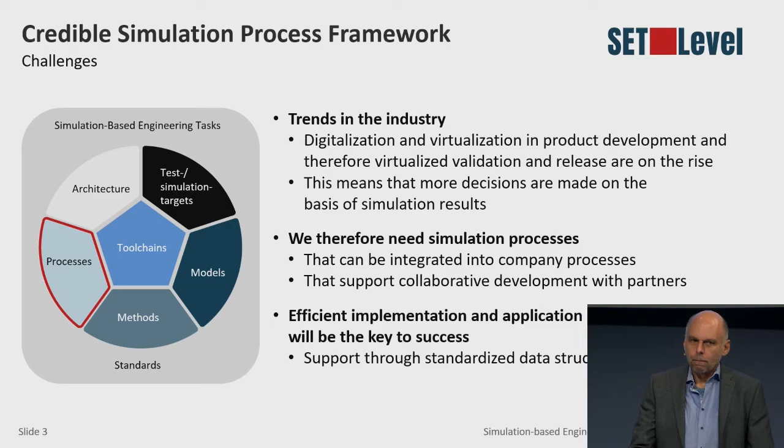So I want to start with the challenges, give a little overview, and the main part is how do we collaborate, especially with partners. So what are the challenges?

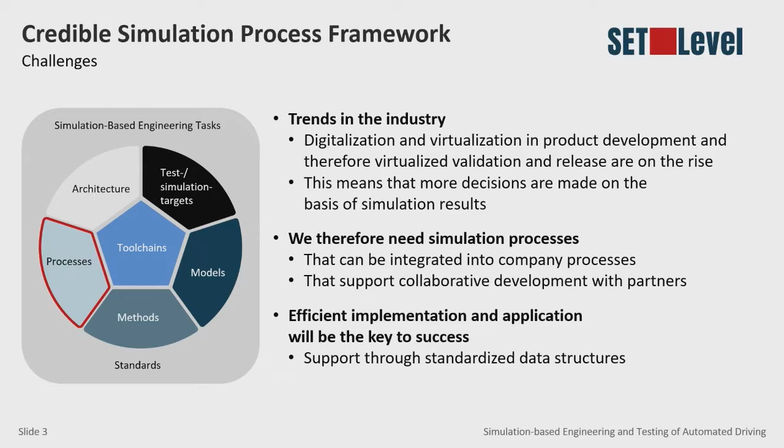In the moment, digitalization and virtualization is increasing. So therefore, we need virtualized validation and release of our products. That means the simulation process gets more important. And what's very important is that these simulation processes must be integrated into company processes, and that must also be supported so we can cooperate with partners. A key factor for success is that we efficiently implement these things so they can be easily used by our engineers. And for us, and that is also the reason for our project, we need standardized processes and standards.

So what you see here is our so-called simulation process framework. We had discussions with about 20 companies, and they all say, well, that fits. In our company it looks slightly different, but in the core, in every company, that fits. And I will explain now a little more in detail.

On the upper level, you see the product development process, and within a product development process you normally have thousands of decisions—design decisions and also release decisions. For every of these decisions, if we use more simulation, we have a so-called simulation-based decision process. That means for every of these tasks, we have to analyze the task, say what risk is inside this decision, and define our subtasks. The subtask can, for example, be simulation or also real testing.

And on that level, we have to collect the results of the subtask and make the final decision. What you see here on that level is mainly the focus of the public-funded project VV Methods. And what we were focusing on here are more the lower parts—the credible simulation process—where we need a clear input and where we can get back a clear output.

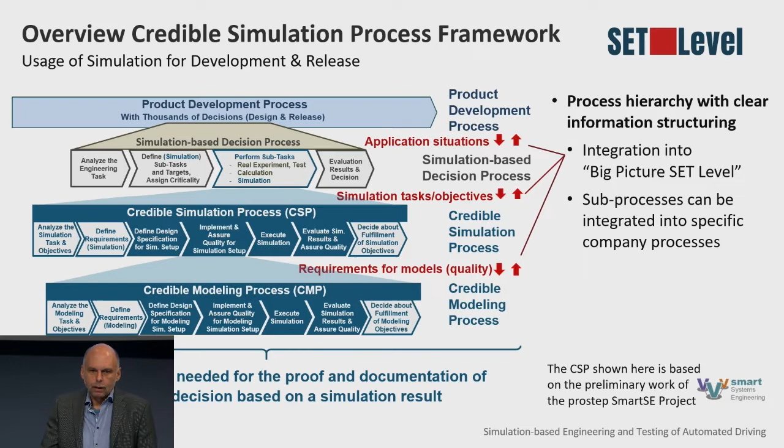What's really important, we need a clear structure, which we also used within our project here. And we also did it so this can easily integrate into company processes, because changing company processes is very complicated. So we have to somehow guarantee that our processes can easily adapt and integrate into specific company processes. And the other point, the really key point here, is we need all this information if we want to make a decision based on simulation.

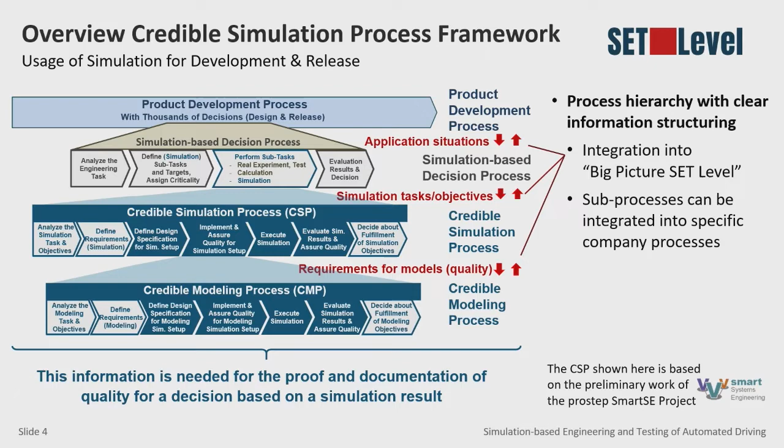Now we shrink that one because that framework is only paper, but what can we do with it? That is the next point. So that framework also gives you a frame for our methods, the methods we develop within the project. Because if we have, for example, a validation method, it must be clear where we use it in the process, what we need for input, and what is the output. And therefore, we use that simulation framework.

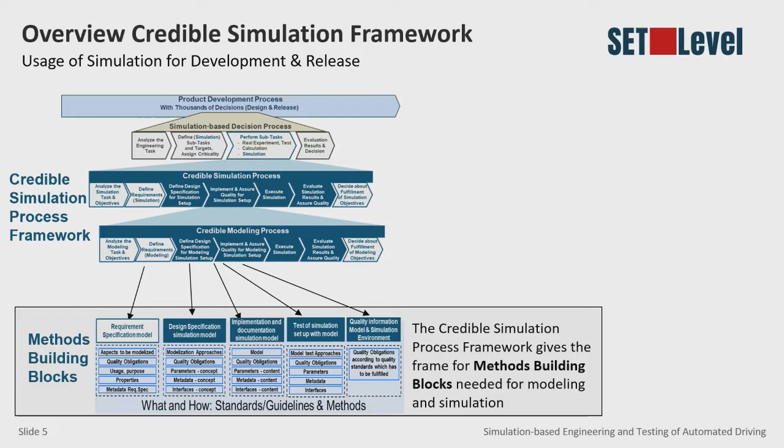And as I said, a process framework is normally only paper. For it to work efficiently, we also need data standards and somehow IT support. And what we already achieved is that we have data formats which are consistent, and we already have tools which support that process.

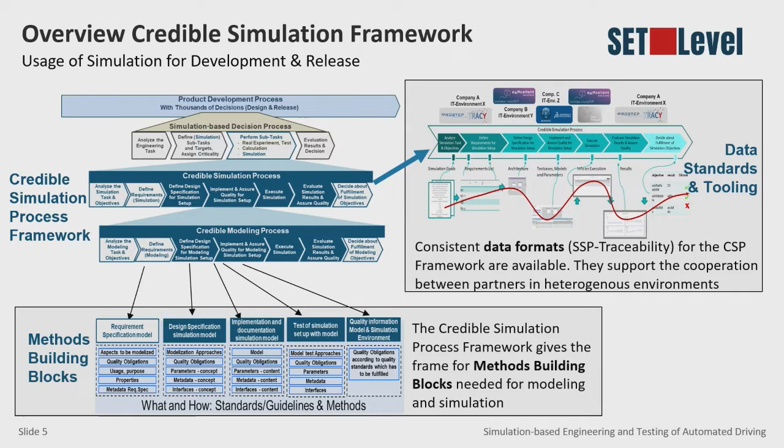Now to the very important point, because inside a company that often already works. But what's now very important, especially in the field of autonomous driving, is we have to work together with partners. So, for example, if an OEM, partner A, is developing an autonomous driving function based on a camera signal, for developing it he needs a camera model.

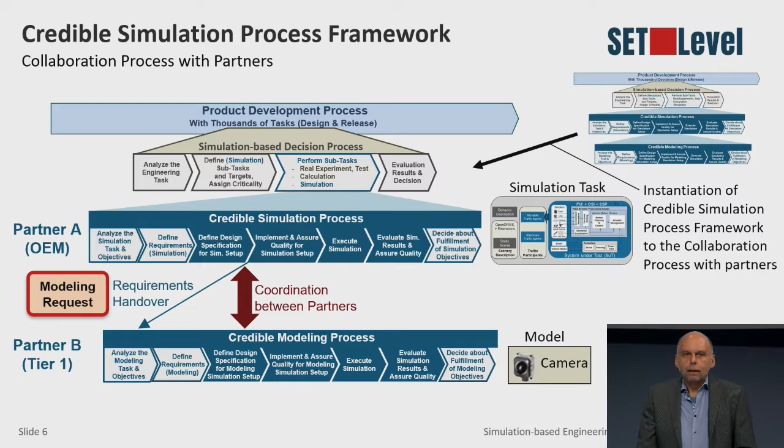For him to get the right camera model, he has to give the necessary information, we call it a modeling request, to partner B. So partner B can develop the right model, and the model can come directly from a library, or the model from the library has to be modified, or he has to develop a new model. And what's also very important, the development process, whether it's in the library or modified, is nearly the same, because we need some proof of quality from our model.

So we have nearly the same row of elements in the process whether we are doing a simulation process or developing a model. And then we give the model back.

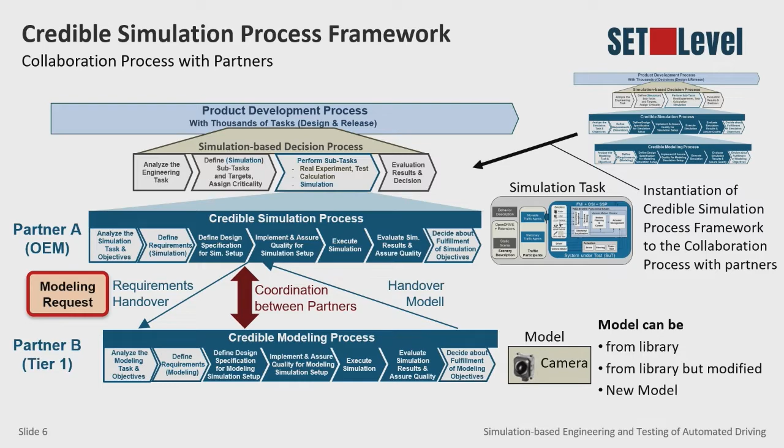And now what's very important, and what we're analyzing at the moment, is a weak point: what information do we have to give from partner A to partner B? Because every company makes a different structure, different information, and that's often a problem. And therefore, as you saw before, the credible simulation process has a clear structuring, and we say we should use that structuring also for the information package.

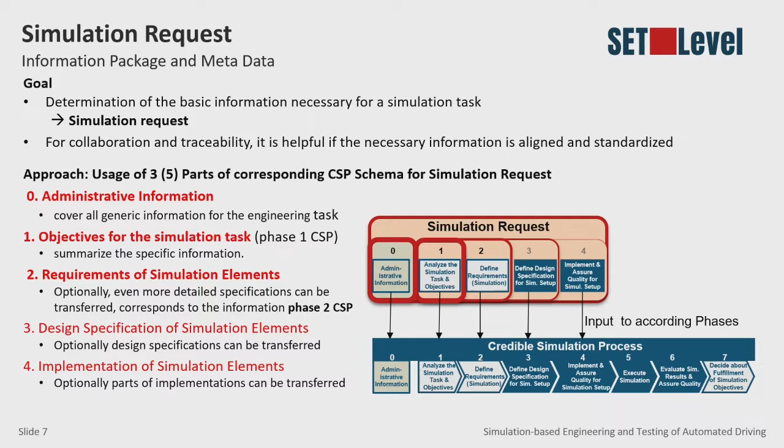So we have the same basic structure in the simulation request. We need administrative information, we need objectives, and so on. And now I want to go through that chain and look, can we achieve here somehow traceability?

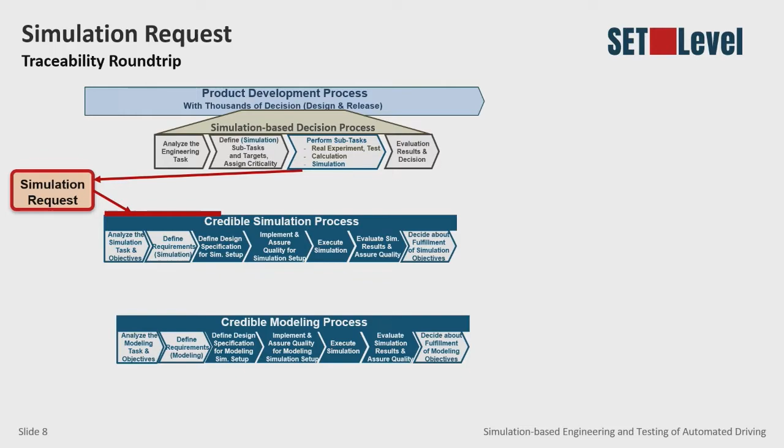So in the beginning, we need the simulation request, which is sent from the partner, or within our company, to the credible simulation process. And from the simulation process, if we need a model, what information do we need for the credible modeling process? And here we also have recursion.

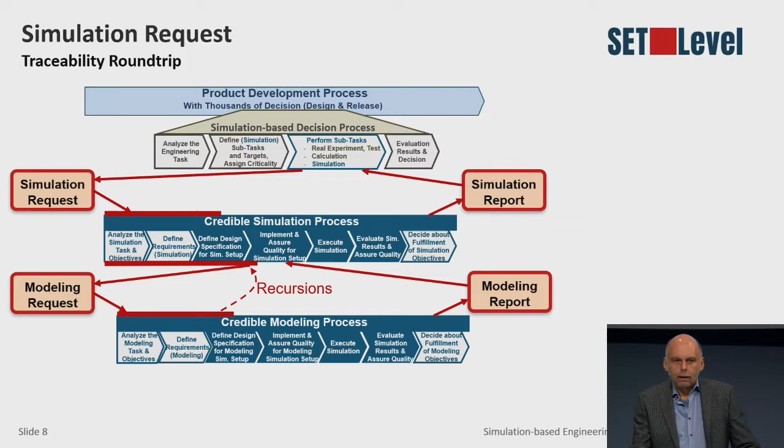So often people say, well, that is a time scale. No, it's only a logical sequence. So at every part, recursions can occur. And then we get the modeling report back, and also the simulation report with the result.

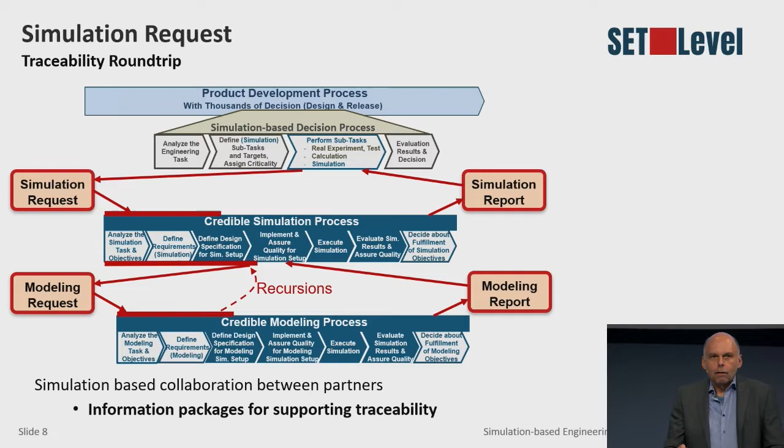And for us, it's very important, and that was also a big and good finding. We need these information packages, and if we structure them in that way, we really make cooperation better and reduce our effort. What was very important is that consistent data formats already support that, and they are available.

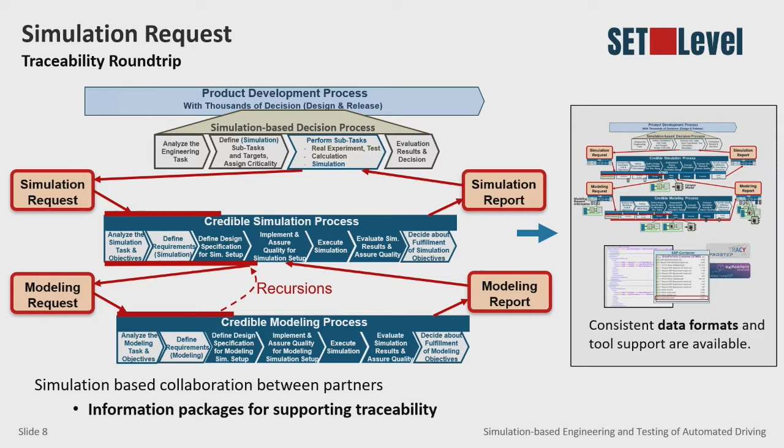But what happens if you work together with a partner in your company or externally? That row of information is broken. How can we close that broken row? How can we achieve traceability?

First, we need the credible modeling process, so the chain is somehow closed. And now come the important points.

Up to now, normally you get paper which specifies the structure of the model you have to develop, what the inputs and outputs are. We are using FMI and SSP, so it's possible that you define the outline of the model, also in a simulatable way.

And what we also think is very good, is that if you have some acceptance test, you should also deliver a simulation environment which contains the environment models, the boundary models, so that partner B can simulate with that infrastructure we send to him. And what we did is pack these elements from analyze and design into that package.

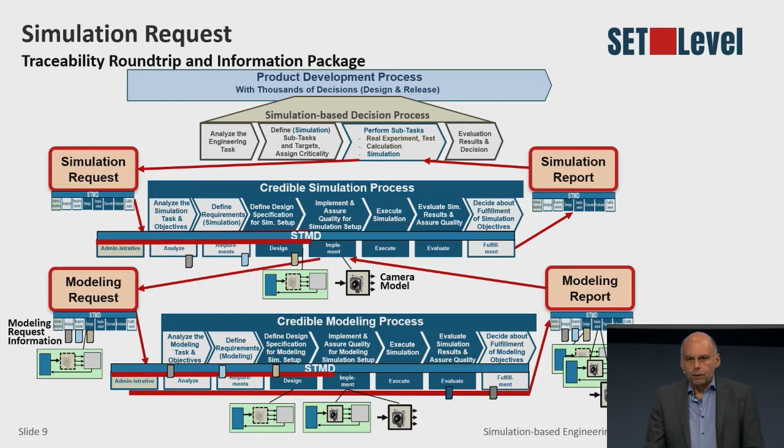So, now to the summary. I think we need the use of simulation for the development and for the release of automated driving functions.

With the credible simulation process framework, we now have a framework which supports traceability, which can be integrated in all companies, and that's for me the most important point, that it supports collaborative development with partners.

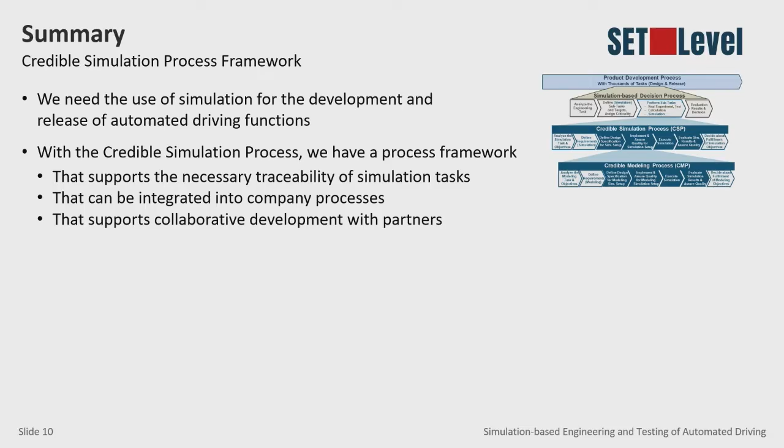And the proof of concept we did in the use cases shown here, and with a workshop. We made couples with an OEM and with suppliers, and we had four couples, and we played through these processes, and we said, well, that is exactly what we need. So that proof of concept is already done.

And what's very important is that consistent data formats and tool support are also already available.

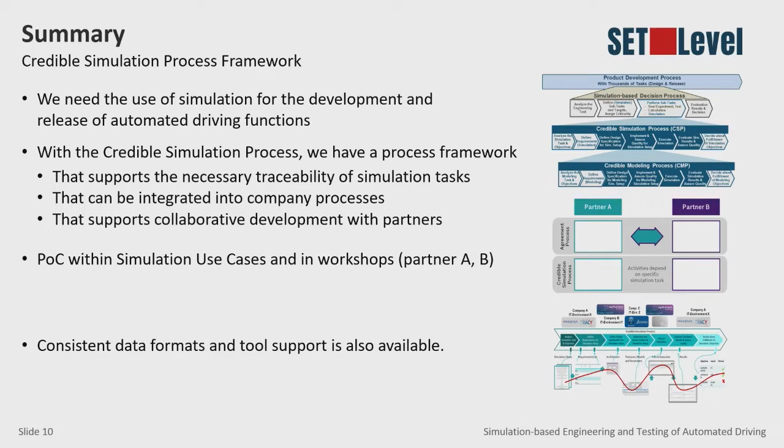And now to the takeaways. The work results are available on our internet or web pages.

Also an important point: what happens after the end of this project? The dissemination and maintenance of the credible simulation process is guaranteed, and it's further developed by the ProStep SmartSE project, and it's already used in other publicly funded projects like the ITEA UpSim project. UpSim stands for Unleash the Potential of Simulation. And the data formats like SSP Traceability, STMD, SRMD are hosted by the Modelica SSP project.

Well, that was my talk, and now we can look to the simulation engineer. The red hat has really changed from deep red, not to deep green, but slightly green. So I think we have achieved a little good result. Thanks a lot.